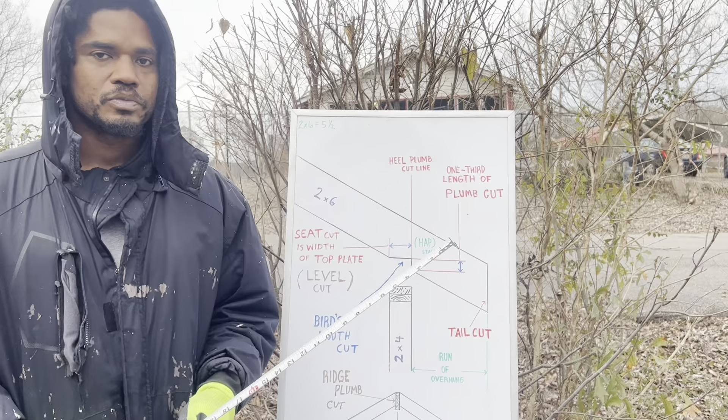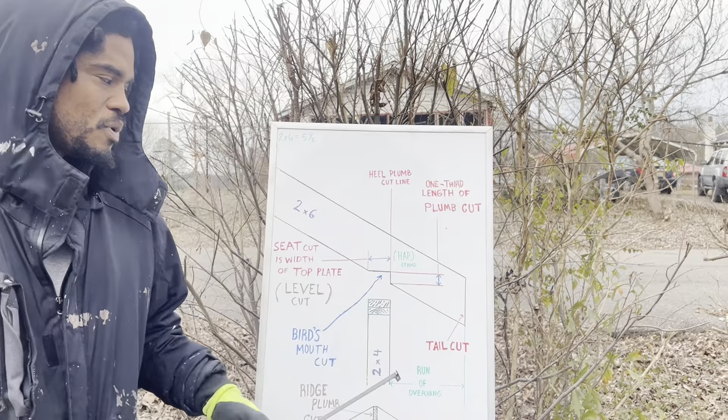The bird's mouth, or a bird's mouth, dealing with rafters, all right? Look at my whiteboard right here. Or a bird's mouth cut, all right?

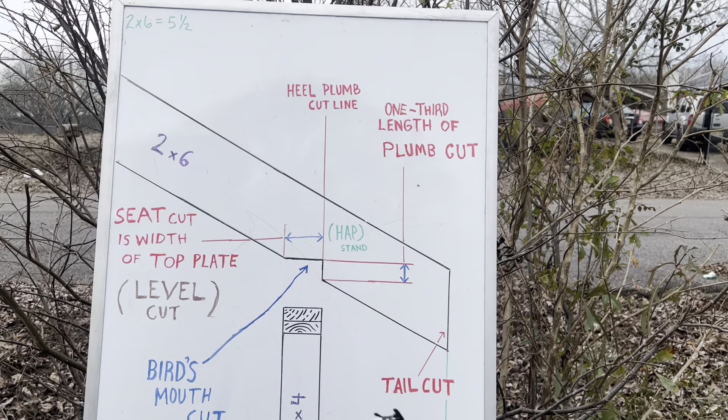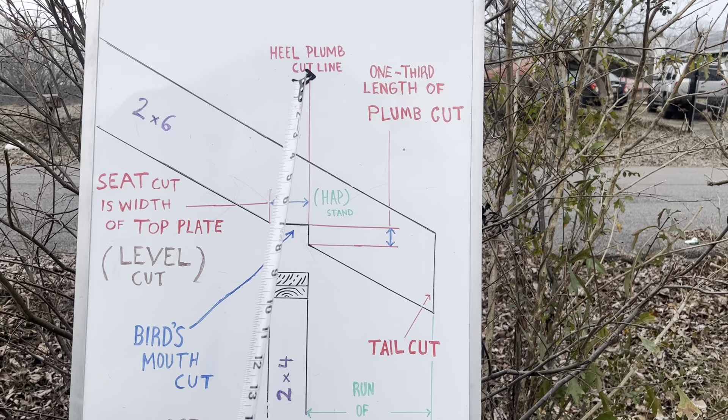Now, the bird's mouth is a combination of two cuts, okay? It's a combination of your seat cut and your heel cut. Okay, let's start right here. Now, your seat cut is the width of your top plate. Your seat cut also is called a level cut. And that's what we'll be dealing with, level cuts and plumb cuts, okay? Level is dealing with your horizontal plane, plumb dealing with your vertical plane, okay?

So in this demonstration or drawing right here, I got a 2x4 stud wall, right? This is my double top plate, okay? So my seat cut is going to be 3.5 inches, okay? You see the blue arrows right here? It's showing the dimension of my seat cut.

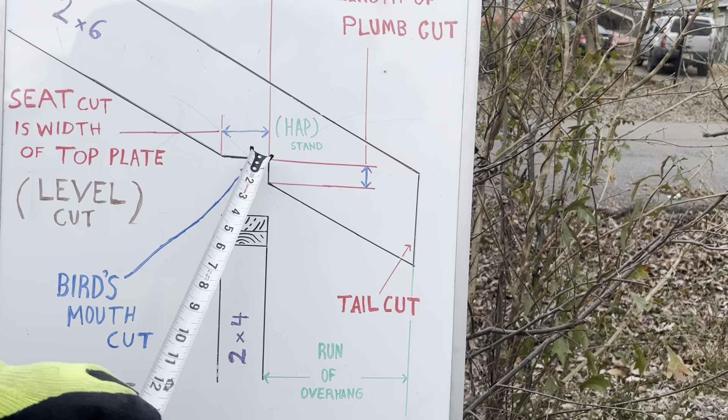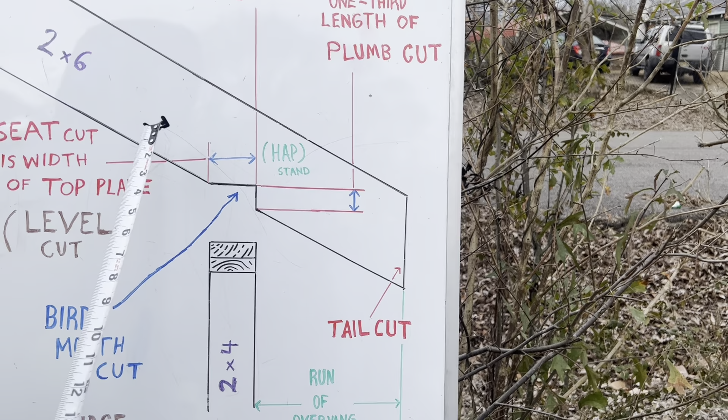Okay, now let's go right here. First of all, this is a 2x6 rafter. And I want to make mention that, if you're building with 2x4 studs, okay, you want your rafters to be wider, okay? So that's why you'll use 2x6 rafters. And also, you want your ridge beam to be wider than your rafters, okay? That's for surface area. So if I'm using 2x6 rafters, I would want a 2x8 beam, okay?

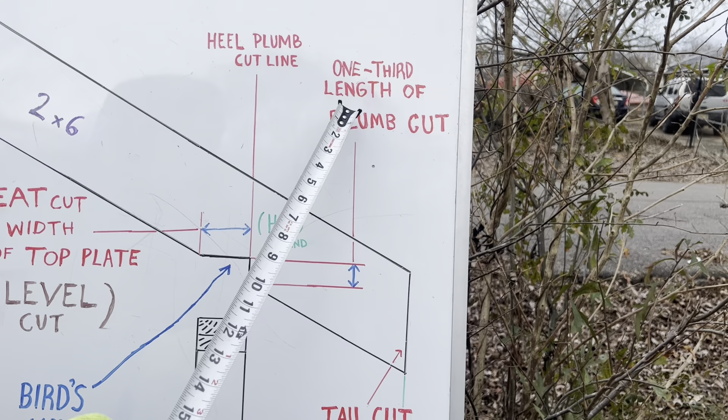But this is your heel plumb cut line, okay? Right here, your heel plumb cut line going right down there, okay? Now, if you look right here, 1/3 length of plumb cut. So you don't want to take out more than 1/3 of your rafter, okay?

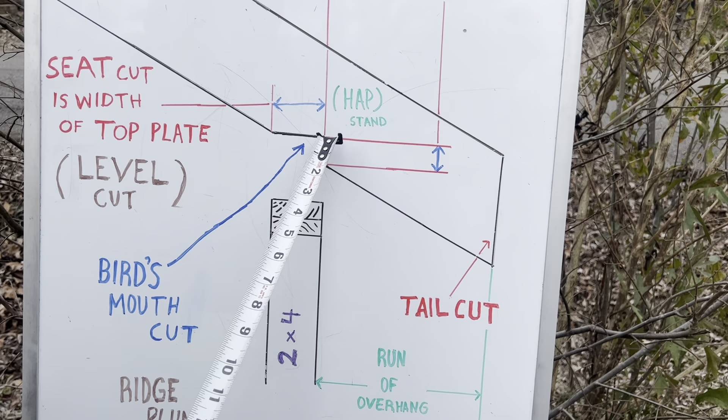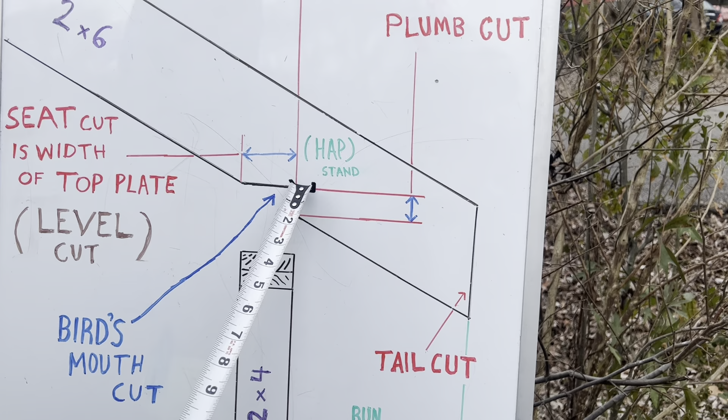So let's say this plumb cut line from here all the way up to here is 6 inches, okay? 1/3 of 6 inches, 2, 4, 6. So 2 inches right here. So this heel plumb cut line or the notch, the depth I'm finna go into this rafter is not gonna be more than 2 inches. So I would have 3.5 inches right here, 2 inches right here, and that's gonna be my bird's mouth. And it's gonna sit on my wall, okay?

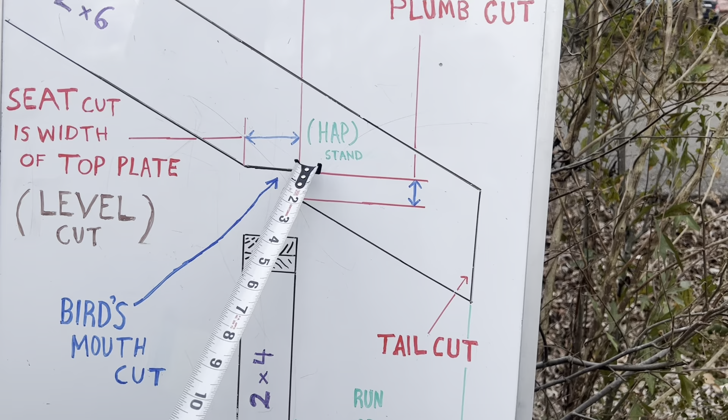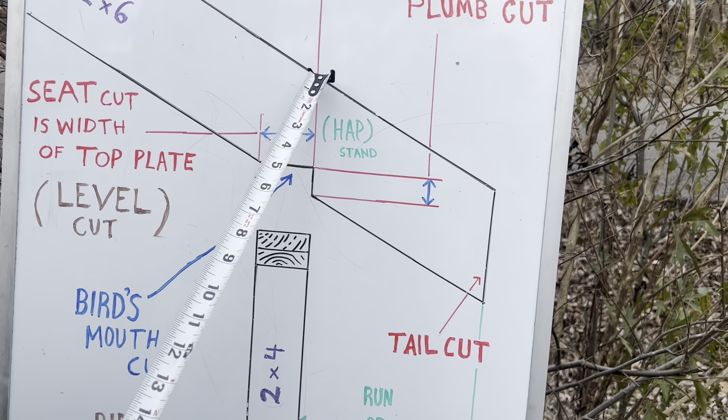Now, this length from this corner up right here, that's called your hap or your stand, okay? The hap is the acronym for height above plate. So you're gonna wanna know your height above plate. That's gonna be vital for your calculations once you're doing your rafter and your ridge board positioning, okay? You can do this all by math, okay?

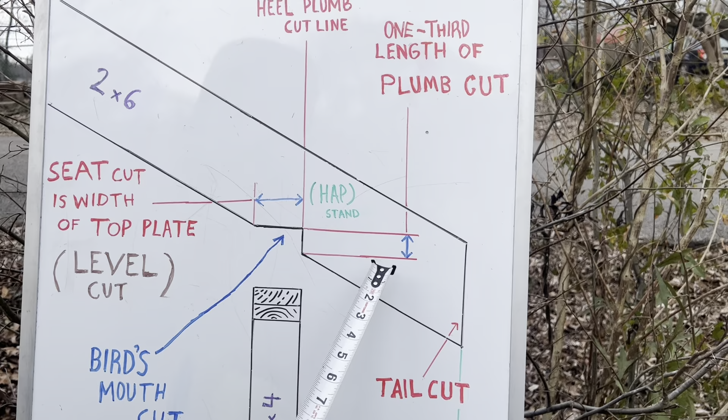Let's keep on going. I talked about the 1/3 length of the plumb cut, okay? This is your tail cut or tail plumb cut right here, okay? So we know about three types of plumb cuts, okay? You got your tail plumb cut, you got your heel plumb cut, and if you look right down here, this is your ridge plumb cut, where your rafter meets your ridge board.

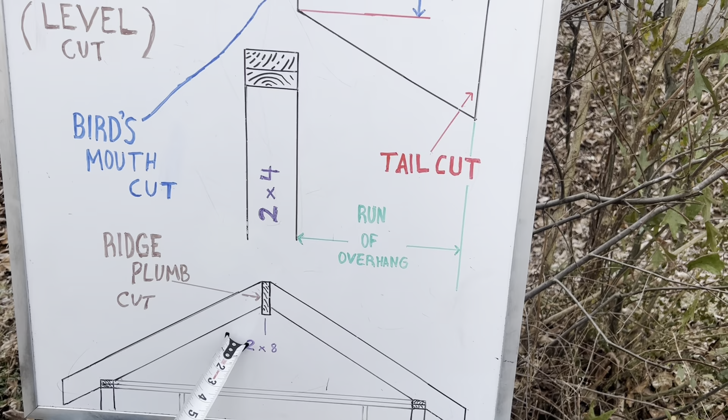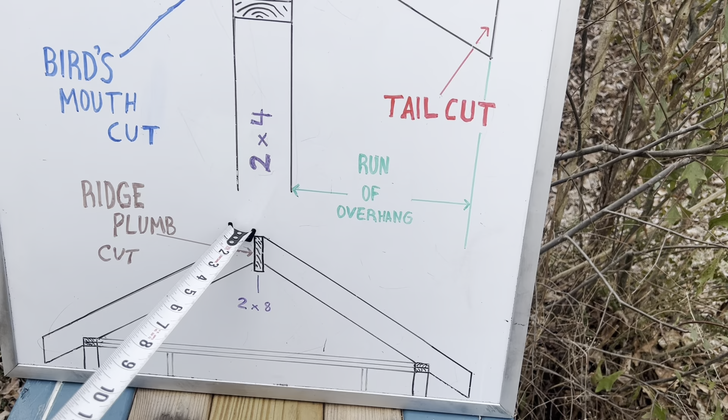And if you look right here, I got 2x8 for your ridge board. Ridge boards are normally non-structural, okay? Ridge beams are structural members, all right? Now, this ridge board is basically acting as a surface area for these rafters and positioning, all right?

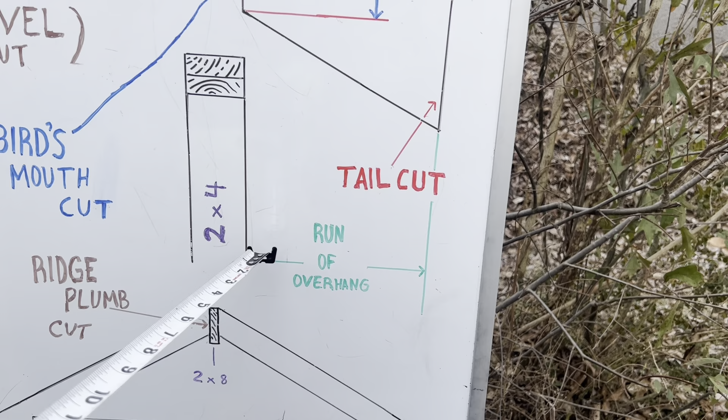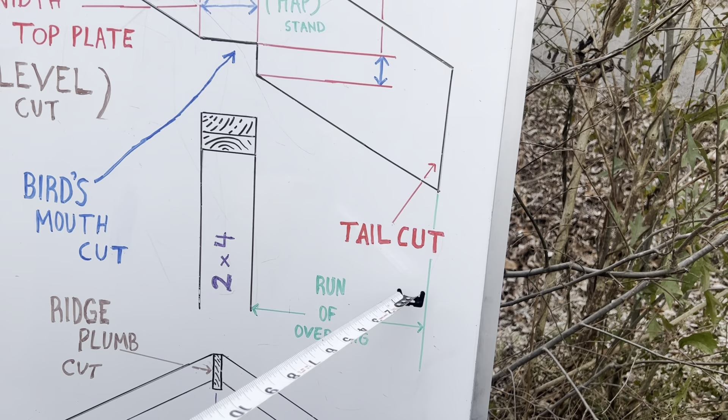Now, okay, I skipped right here. This is a run of overhang, all right? So we're coming from the exterior wall, okay, all the way to the tail plumb cut, okay? Now this, let's say this is 1 foot or 12 inches. That'll be your run of overhang, okay? It is not calculated by the length diagonal right here of your rafter, but it's calculated on the horizontal from your outside stud wall, okay, to your tail cut line right here.

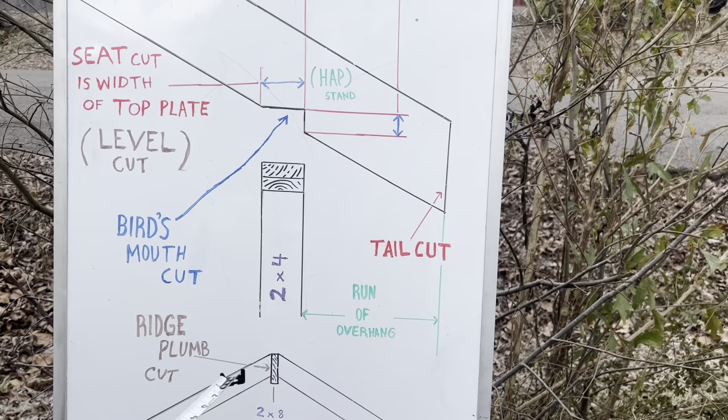All right, now I think I held y'all for long enough. I'm gonna get more in depth about the bird's mouth, the calculations and all that later on.